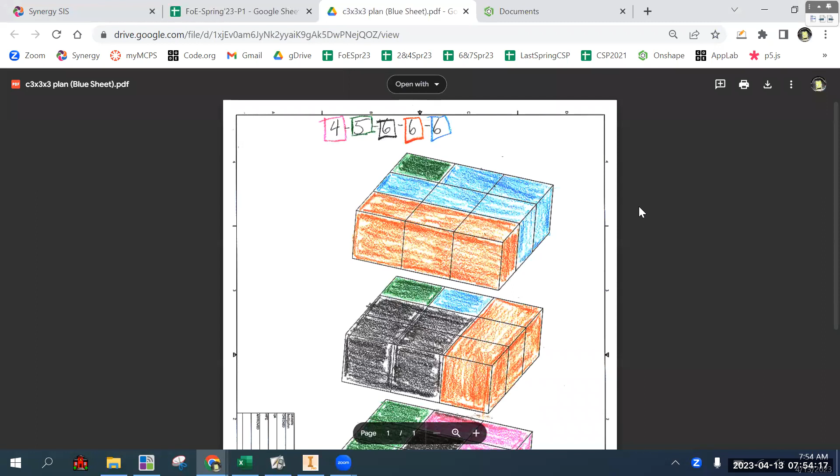So at this point, you should have your exploded view plan done and approved. Once you get that approved and turn it in, take a picture for your own records.

Hold on. I hope that's recording.

We'll see. Okay, once you do this, the next thing to do is to do it in Onshape to actually build the individual pieces.

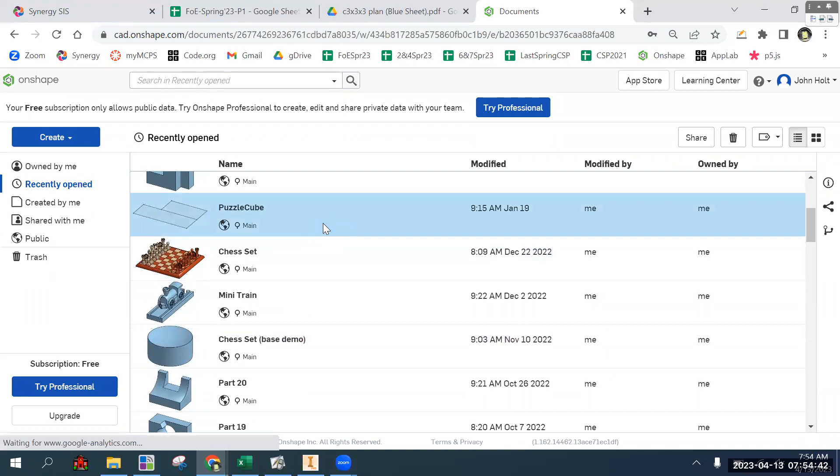And then I guess we'll do assembly next time. It's not that hard. And then we'll do technical drawing stuff.

Okay, so the way you're going to do this is, well, just go ahead and do this: start a new document and call it Puzzle Cube.

And this is where you're going to make all of the part files, the assembly, and all the drawing files, which is the new requirement.

Okay, so from your plan, just start making them. Okay, so you're gonna have 5 different parts.

Key is that each individual wooden block is 3/4 of an inch. Please try to stick to that. If you are inconsistent, you'll have to redo it because it won't fit in the assembly.

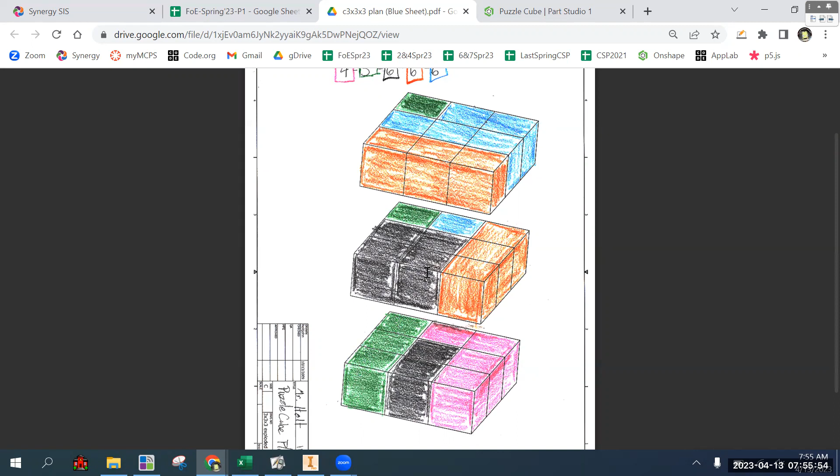And these are going to be at least as fast, if not faster, than the green sheet parts. Okay. At most, you have 3 different part features.

So let me just make a couple of these and I'll show you some easy mistakes to make. Firstly, shortly, as soon as I'm done here, I'll put out the snap cubes, which are the little plastic toys.

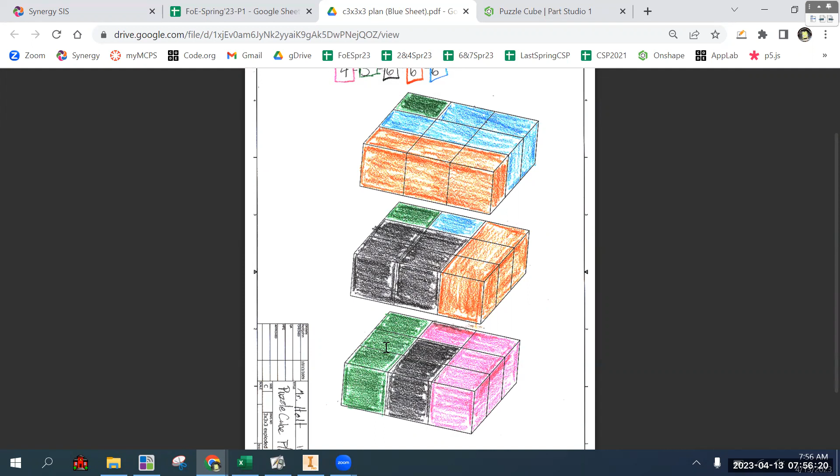That can help you make the different parts, or at least help you prevent making a mistake.

Yes, this is not Onshape, but it's just a better way of demonstrating what we're doing.

So once it pops up, okay. So where were we?

Depending on how your part is oriented on your blue sheet that you've completed, it might be confusing. Didn't I just open something?

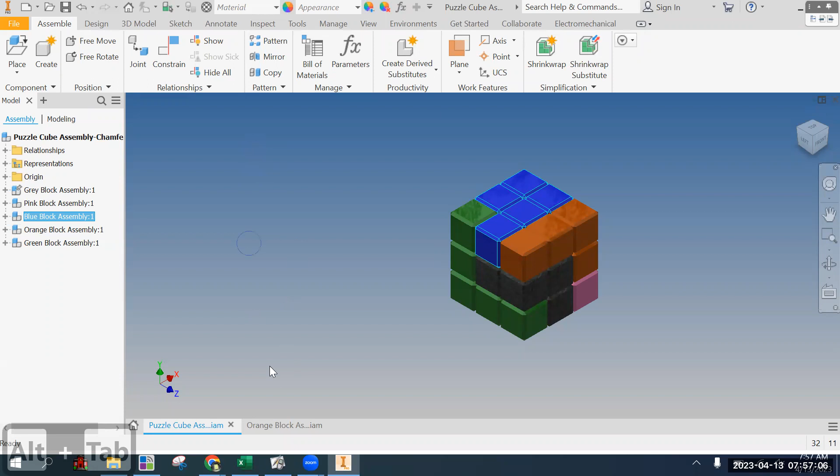Wow, it's taking a long time. Oh yeah, there we go. Depending on how it's oriented on the blue sheet, it might be a confusing orientation to make it in Onshape.

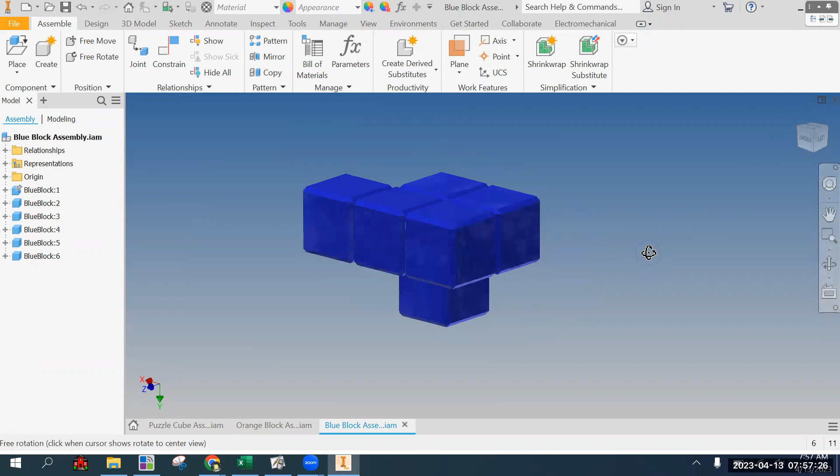So it is, if you are having any sort of trouble, a good idea to get the snap cubes and make the shape, looking at your blue sheet, and then we'll give you a better idea of the best way to make the part.

Okay, so it's super simple. Like if I was making this green shape, it's just a basic L with 3 blocks there and 2 blocks that way.

And you can do this, in this one particularly, in a single extrusion.

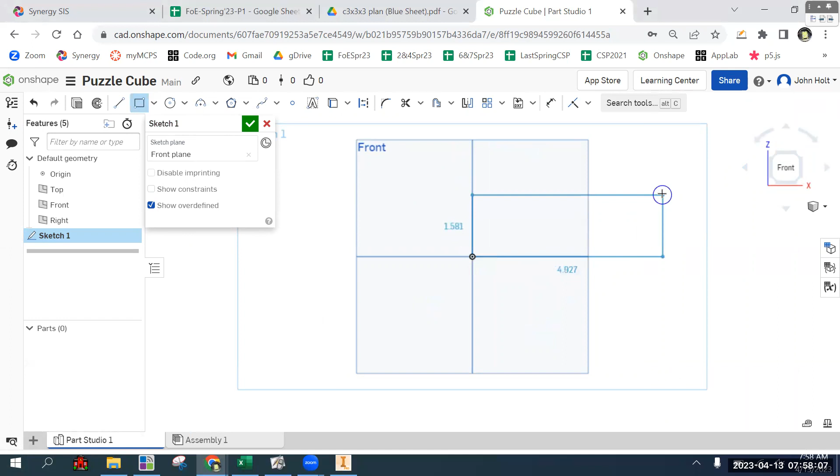Okay, so looking at it straight on, a rectangle that goes like this, and let's go like that. And then we just need to dimension it. Feels like it's been a long time since we've been on this. 3 blocks to the right is 2.25.

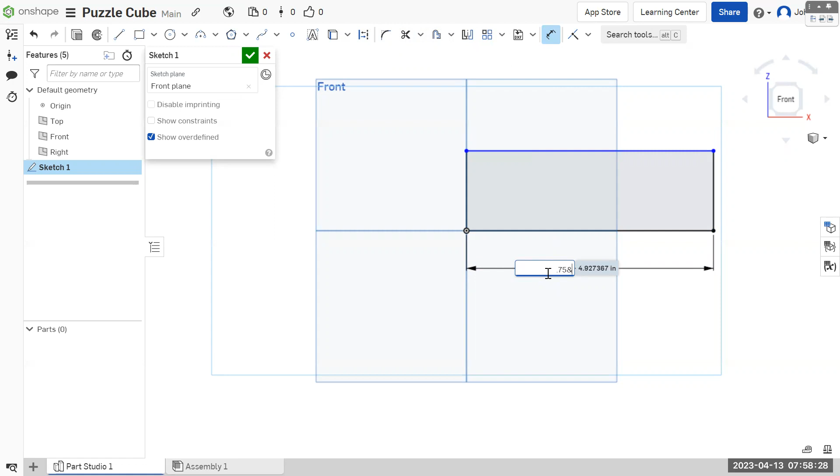Okay, you can also do, I think you can do 0.75 star 3, and it will do it for you. If you don't know the multiples of 0.75, it will handle it for you.

Okay, and this one is 0.75 this way.

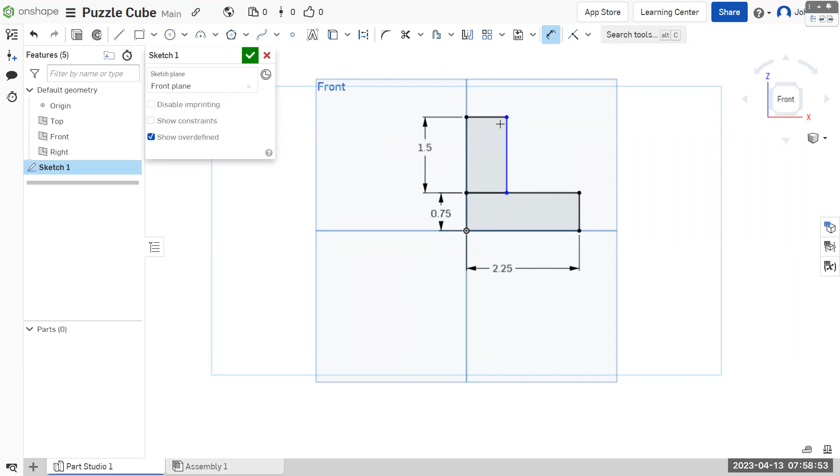And then it is the full L 5 block, which is a farther 1.5 that way and 0.75 that way. And do recall that if any of the edges or object lines are blue, it means that they are not constrained.

Okay, so there's the finished sketch for this one.

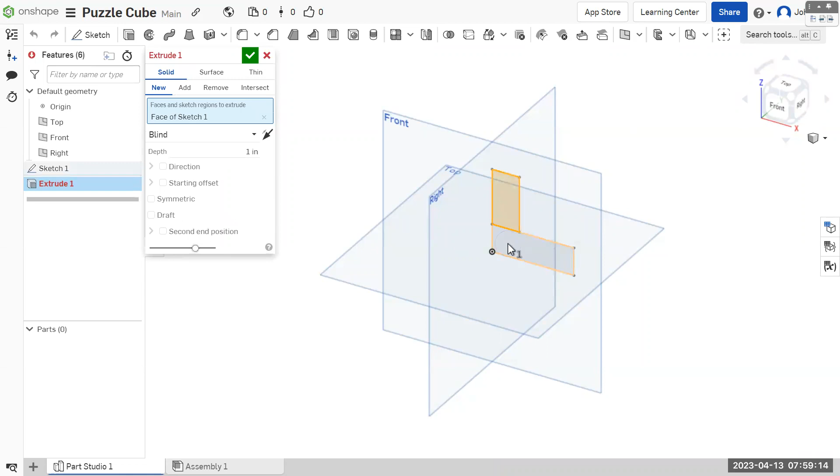Let's look at it from a corner, although there's not really any way to mess this one up, this particular one. And we want to extrude both of these things, and we want to extrude it 0.75.

Okay, please, by please I mean you need to set up the colors of the part. I forget how to do this. Edit appearance, I guess. This one will go something like that.

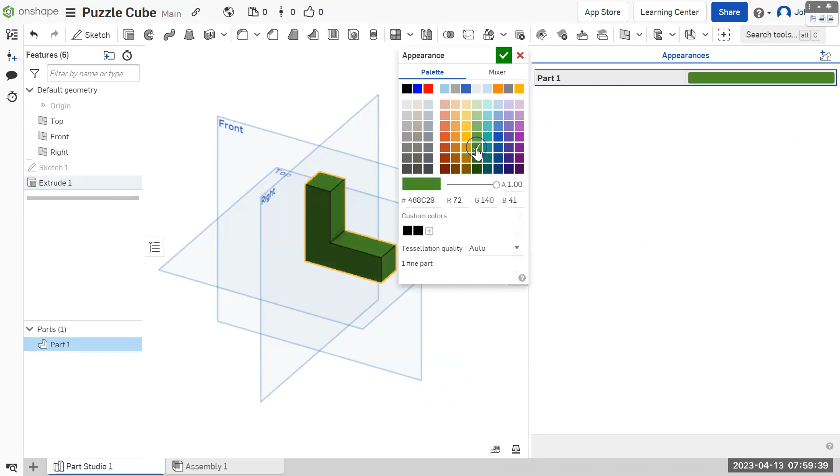There we go. Okay, and that is it for this one particular part.

Let's make a new, well, let's rename it green, and we'll make a new part studio.

And I'm actually gonna just fly through these. They're not that hard. Give me a second. Let's do this and then this, and I'll go like that.

And we'll go back to sharing. We don't need that other one open. And full screen. Full screen.

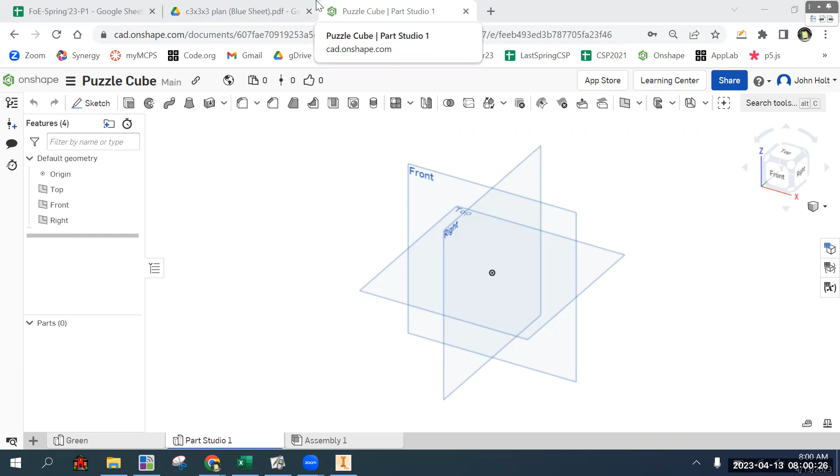There we go. Okay, and so the pink one is just a 4-block L that we can do in about the same amount of time. Okay, so it's just 2 blocks this way.

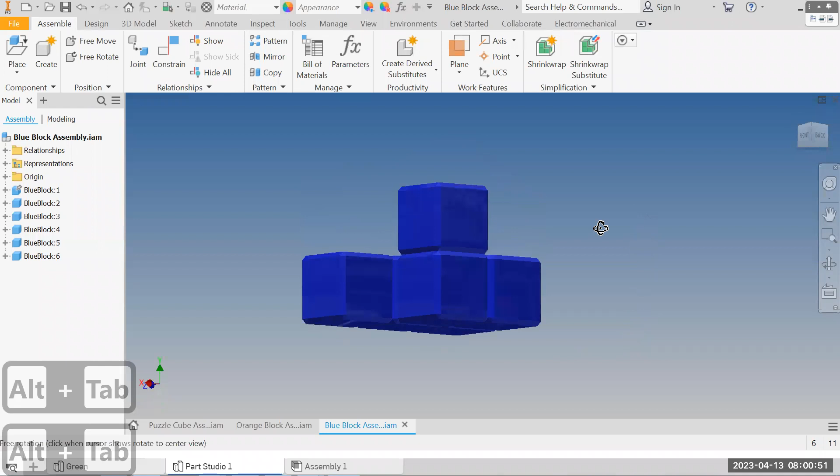You can, if you want to, try to figure out how to make it look like individual blocks, but it's a lot more work, and I recommend not.

Okay, so we'll go, we still have dimension, yeah, this way, 1.5. And then it's the same thing over here.

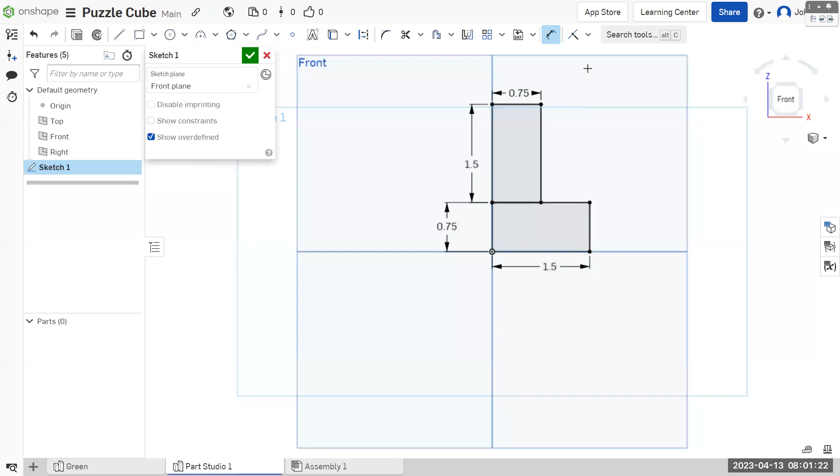0.75 and another, 1.5. No wait, 1.5, there we go. Finish the sketch. Look at it from a corner. Extrude, choose everything, extrude it.

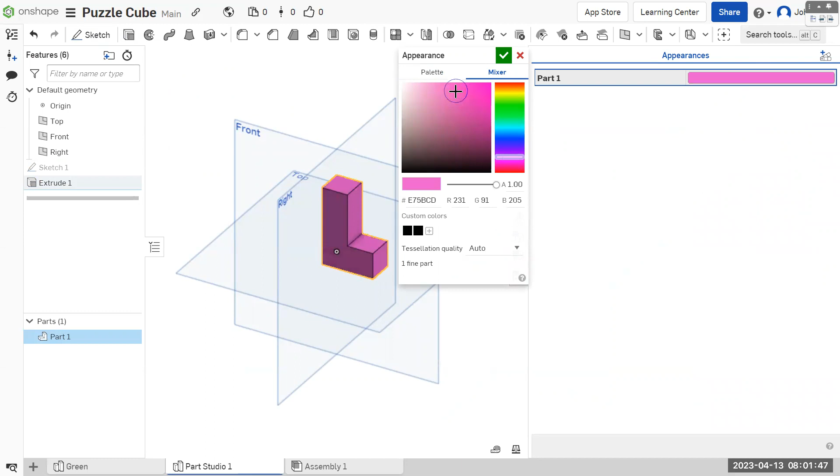0.75, green check. Change appearance, right click, edit appearance. Let's get a... how good is the mixer one? A little pinker, let's do purpley. There we go. Did I mess up one of the dimensions on this?

No, it looks fine. Okay, I'll rename this. Please keep them named. Okay, new part studio.

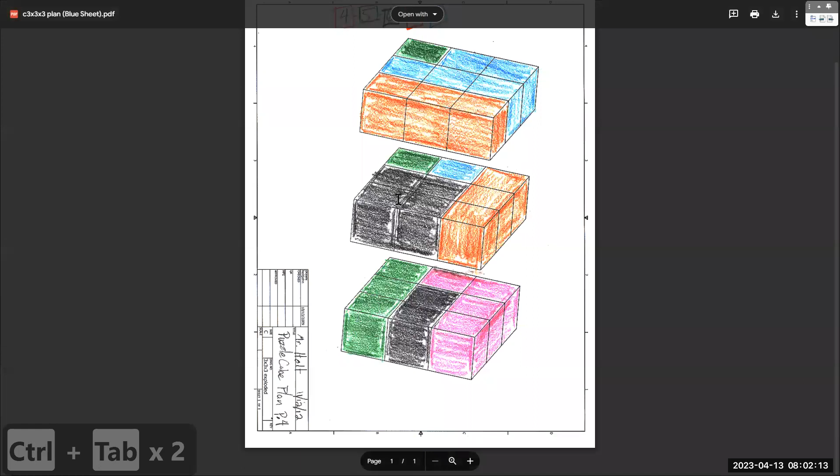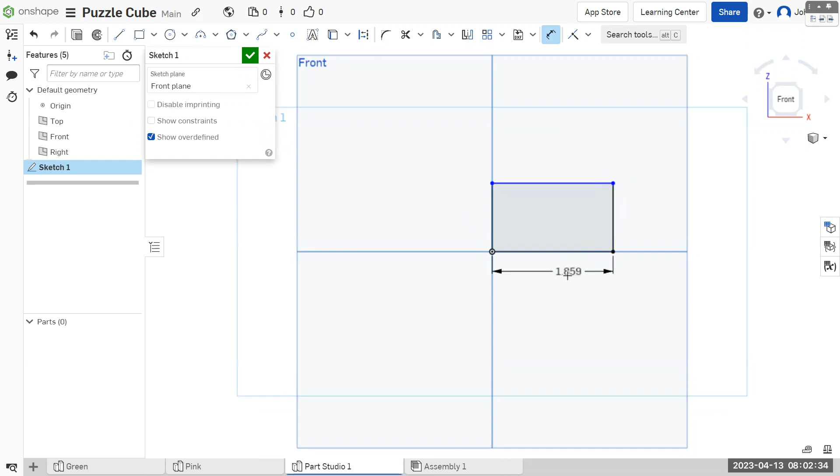And in my particular case, remember, just in case you're confused or forgot, this is my example. You don't need to, you need to do your own design. But the gray one from the other sheet, or from my example, is just a small L extruded 2 blocks. And 0.75, and then another rectangle, which is actually a square.

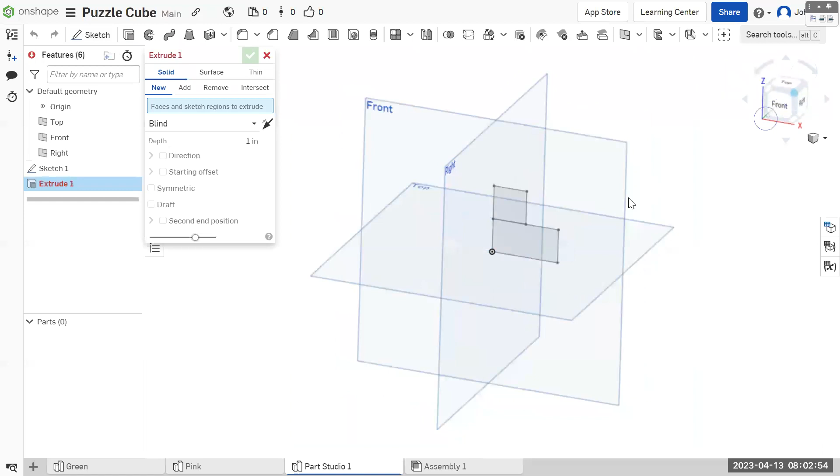Finish sketch and extrude. Choose this and extrude it. 0.75, and oh wait, no, it's not extrude 0.75. It's extrude 1.5 because it's 2 blocks.

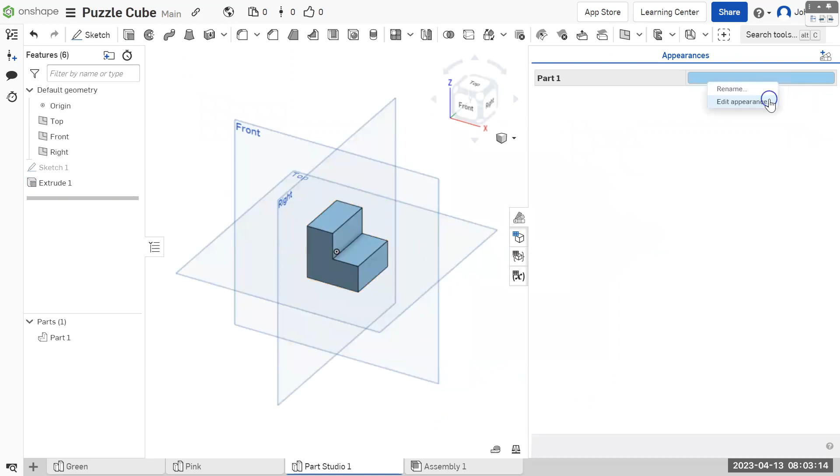And then let's edit the appearance, and it's sort of a gray. We'll work for this, and close that. Rename, gray. And new part studio. Okay, so if you have one that requires multiple extrusions, this is how.

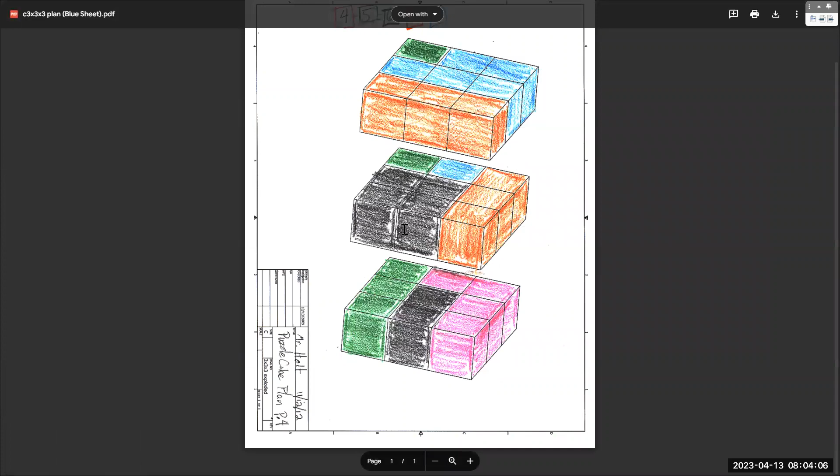In my particular case, there are 2 that require multiple extrusions. You do need to make sure that you do the add instead of new, I think it's called. This particular orange one is 3 blocks this way, and then 3 blocks this way, where again it would be very easy to mess up.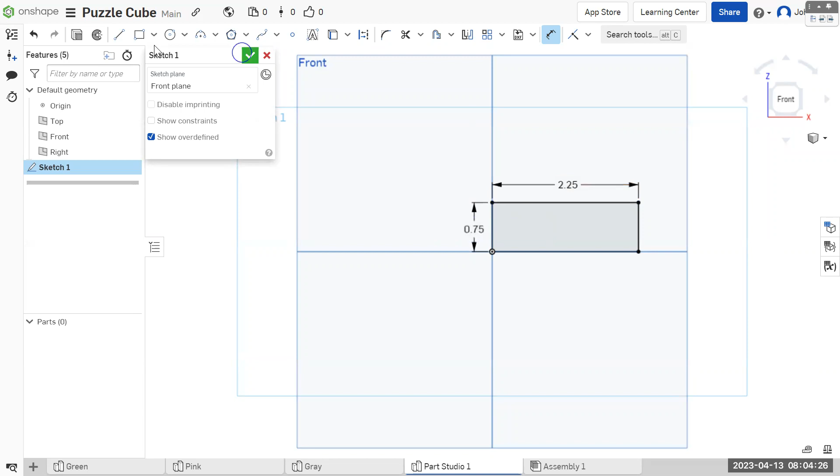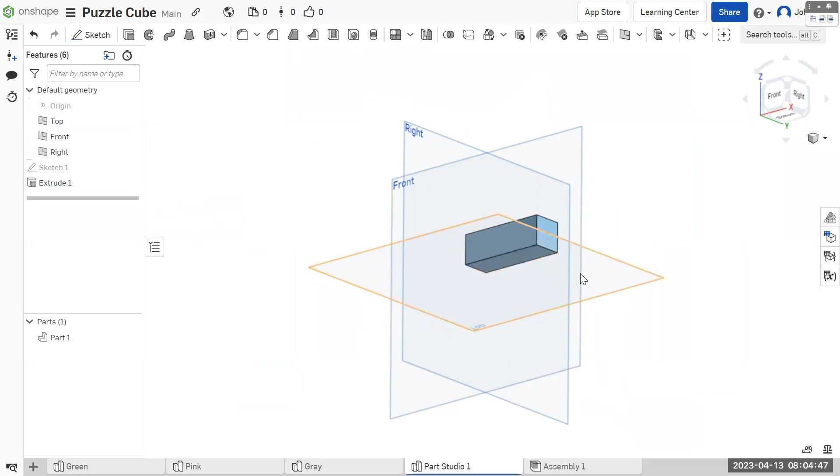So I'm just going to make the 3 blocks in a row with a rectangle that looks like this. 2.25 by 0.75, and finish sketch, extrude this way, 0.75. Okay, so just to keep it less likely to confuse in this particular case, I'm actually going to just put the sketch here and have the extrusion, or the sketch, go that way so that it's less likely to mess up if I do it just sort of the way that it's built.

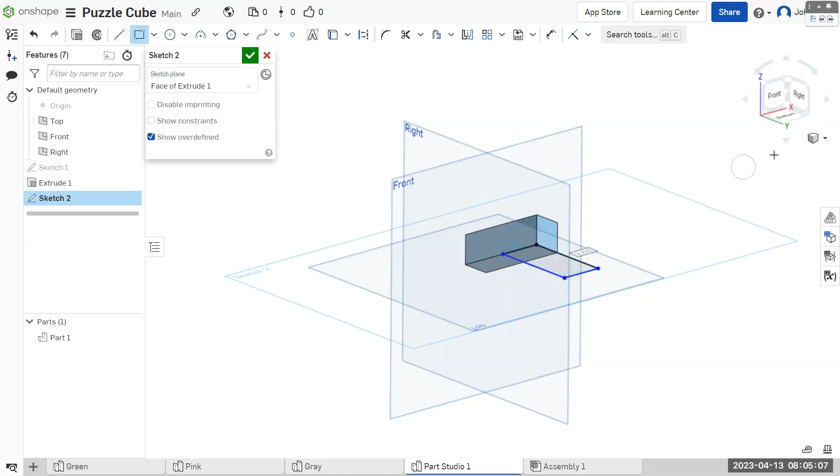Okay, so I'm going to put a sketch here and get a rectangle that goes this way just to make sure we're doing it correctly. And then once I have it started, I know what the dimensions are, which are 2.25 this way and 0.75 this way.

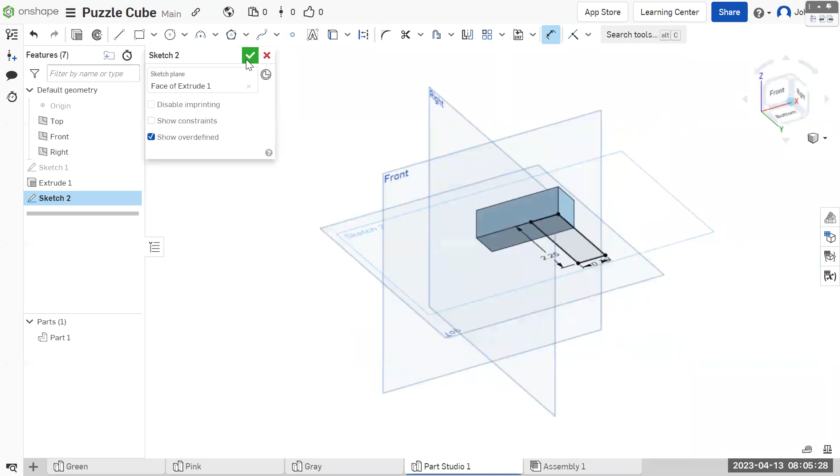And we're going to finish sketch and extrude, choose what we want, choose everything. And we want to make sure that it's on add so that it creates, it extends the same shape. And it's 0.75. There we go.

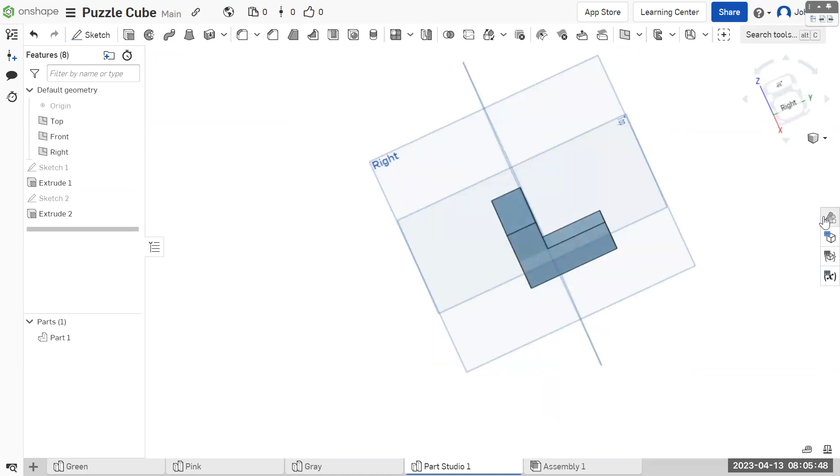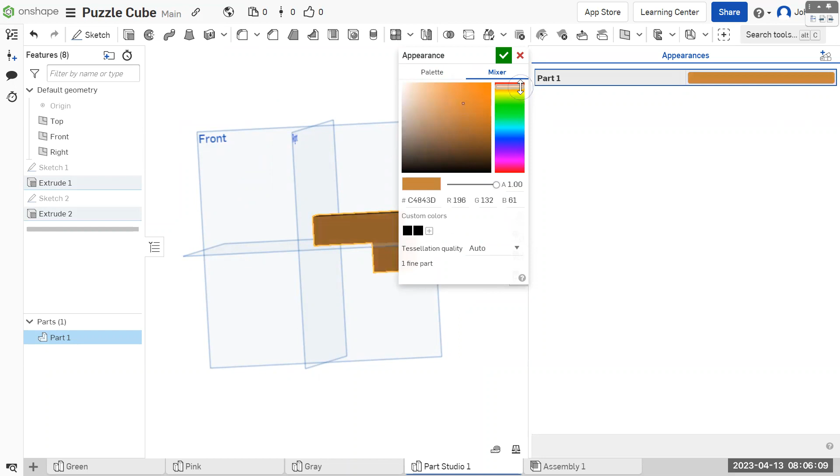Let's edit appearance, right click, edit appearance, and we want something orangish. And that's not a very good orange, it's more of a burnt sienna. Let's go something orangey. Can't I get a good color? This doesn't really matter, okay. So there we go, that's orange.

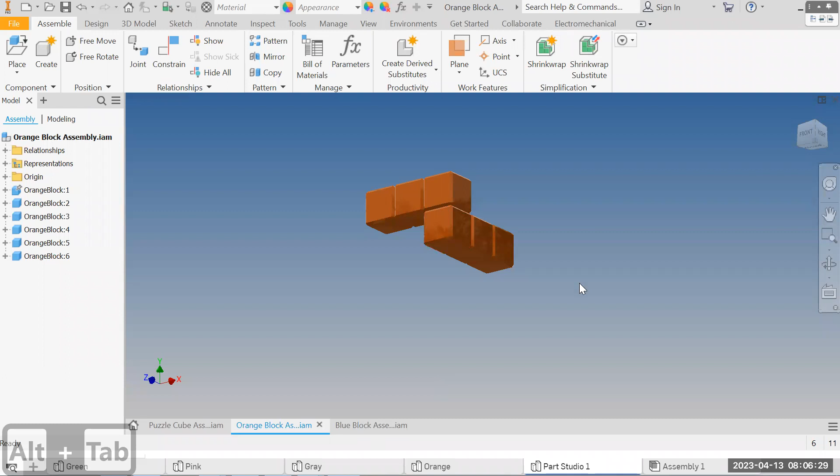Let's rename it as such. And then my particular last one is this blue one, which is sort of, not sort of, it is the 5 block 2 and 3, or 3 and 2, 5 block plus 1 sticking out of, I mean I guess it's the bottom depending on how you're looking at it. And so let's take a look here.

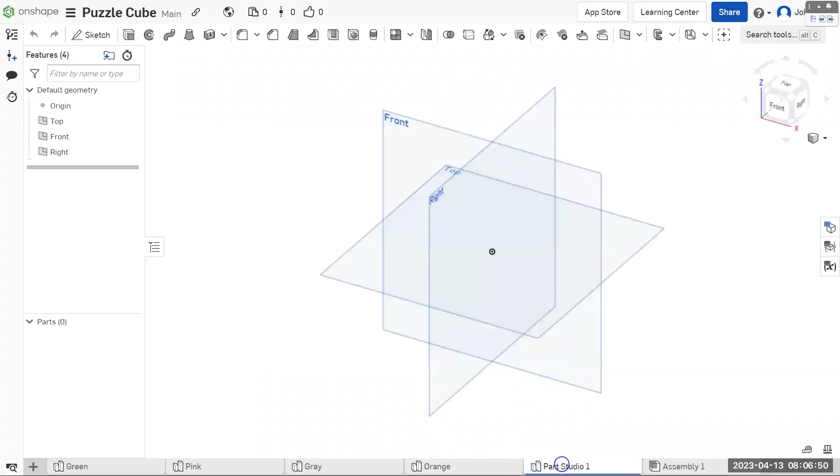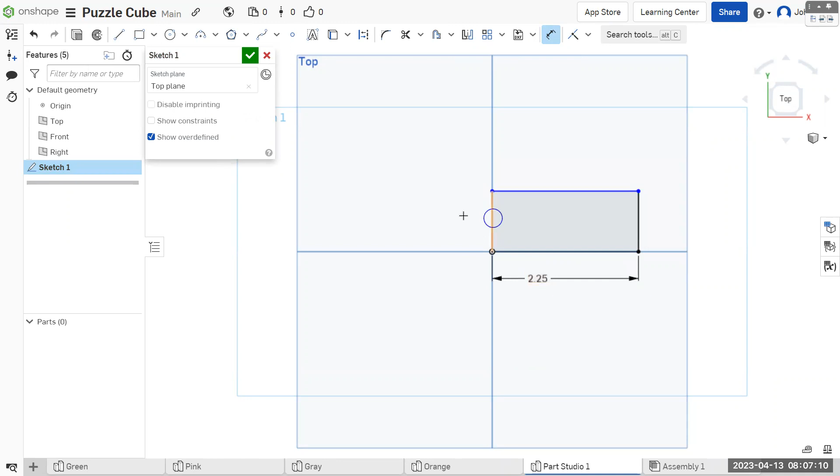Let's do a sketch. You don't have to start on the plane that corresponds from your design, but I think it's easier, less likely to make a mistake. And so we need 3 blocks this way, or 2.25 by 0.75, and then another 2 blocks this way, 1.5 by 0.75. Finish sketch.

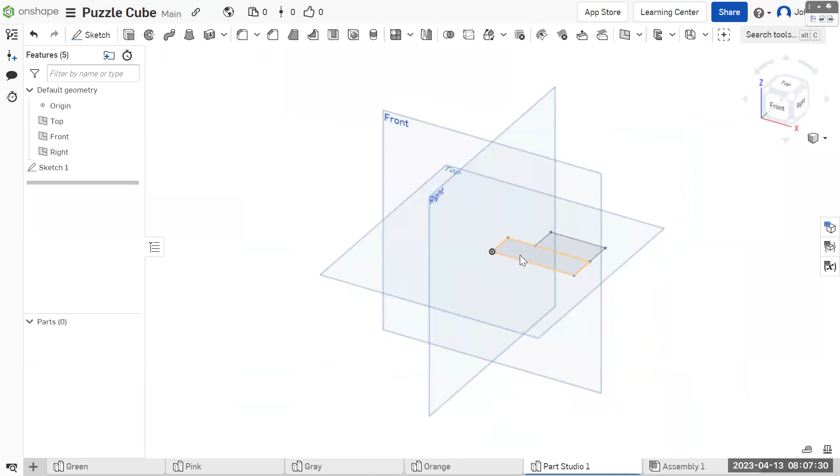And let's look at it like this. We can extrude up or down, it doesn't matter. And we want it 0.75. Okay, and then here's the part you need to pay attention to. The extra extension is underneath this tiny one, or the one corner.

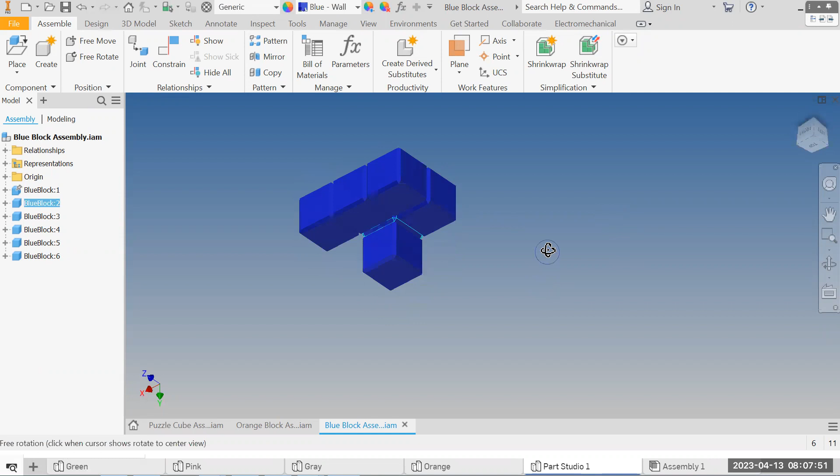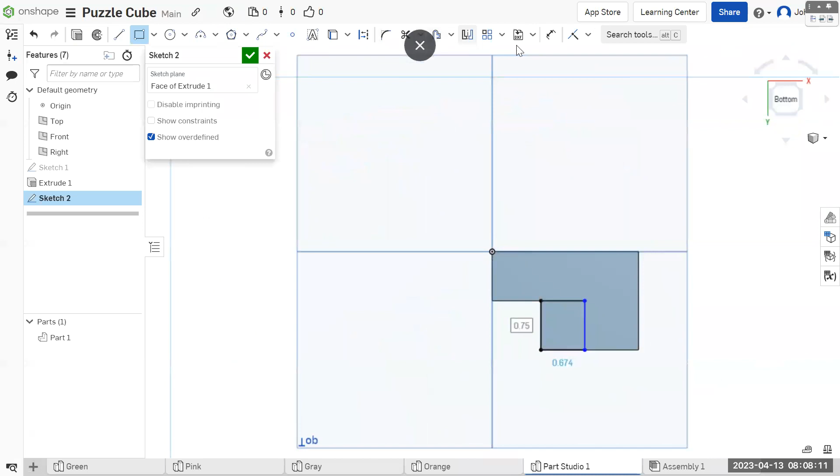So that means it is right here. So I'm going to put a sketch on this face and make a rectangle that's roughly in the right place just to make sure. And then we can dimension it correctly, which it already gave us because I snapped it to a little bit there. Okay, and finish the sketch.

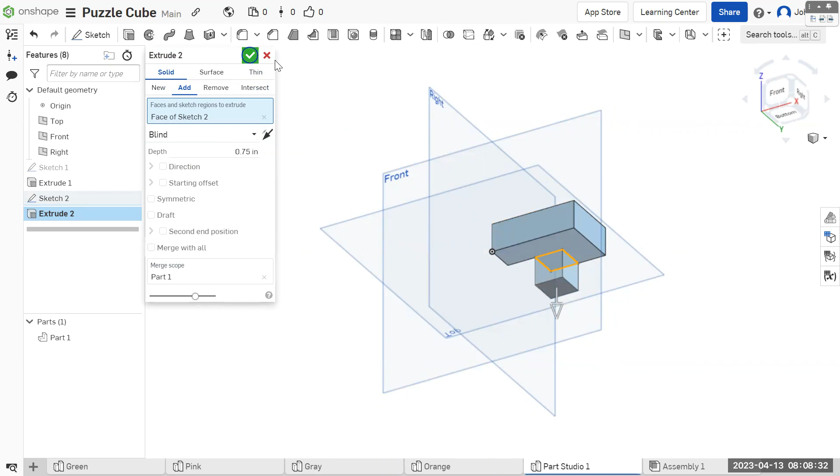Extrude, choose that, extrude 0.75, hit OK, take a look at it. You don't really need to turn off origin planes and points, but I don't think it's going to show up in the assembly if you don't, so it's fine.

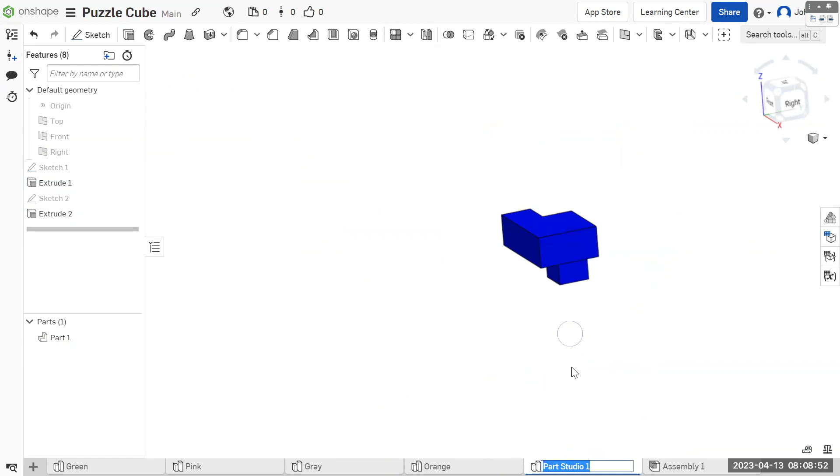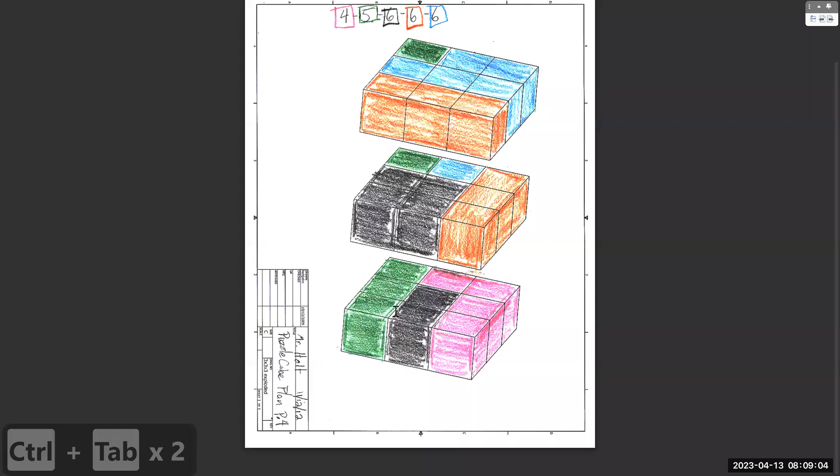And then this one is, for me at least, sort of this royal blue. And let's rename it. And that's it for making the part files, going from your design into Onshape. And I'll get out the snap cubes right now if you think that'll help.

You don't need to take 27 snap cubes, you can just handle 6 of them, because that's your largest piece, and make them one at a time. And that's it. Okay, let me know if you have any questions.